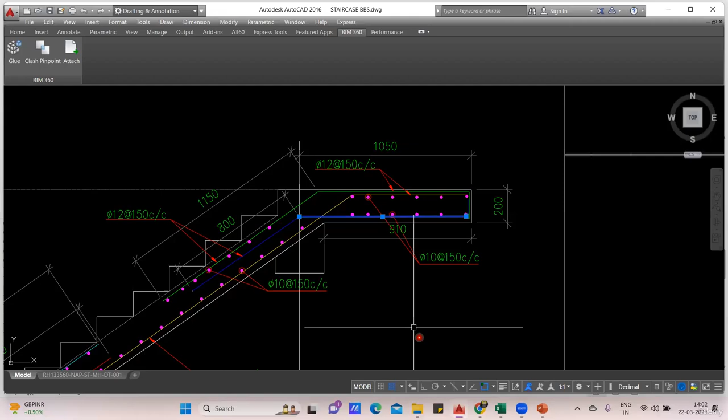So now here onwards, we'll try to find the BBS for this particular bar. So now I'm gonna find the BBS for the green color bar. That is this particular bar, which has gone like this, and then it has got a bend. So again, this is divided into three parts. First, we'll find this part, then this horizontal part, and the inclined part. Now, luckily, this inclined part length is already given, which is 1150. So don't have to worry about this length.

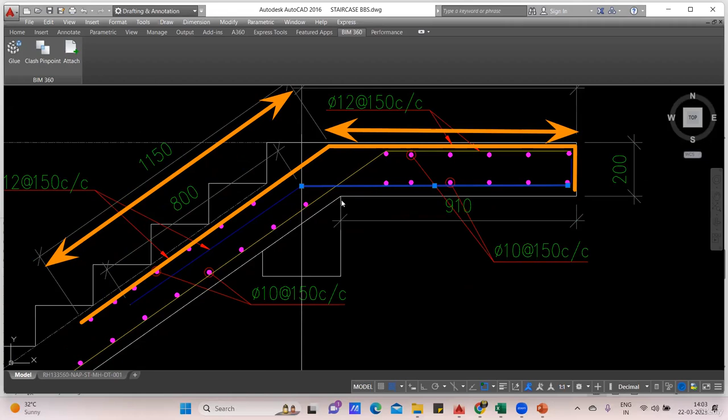Now coming to this part, how you'll find this particular part? That is also very simple. They have given you from here to here it is 910, but they have given one more value, this one. If I bring it down, let me remove everything. They have given you this particular length, which is 1050. So this 1050 is this one. So from this 1050 I'll deduct one cover from this side. Then I'll get this straight portion length.

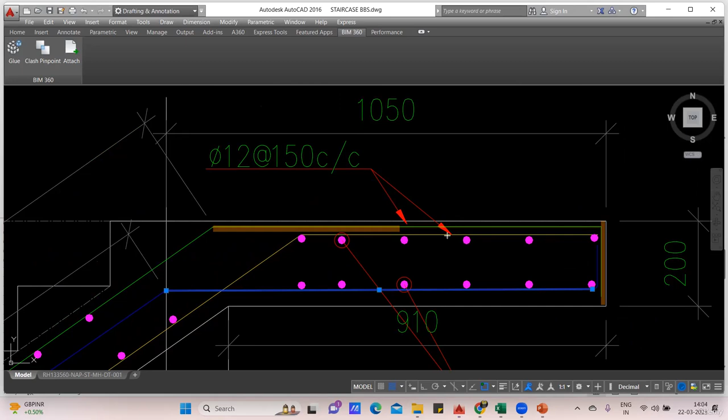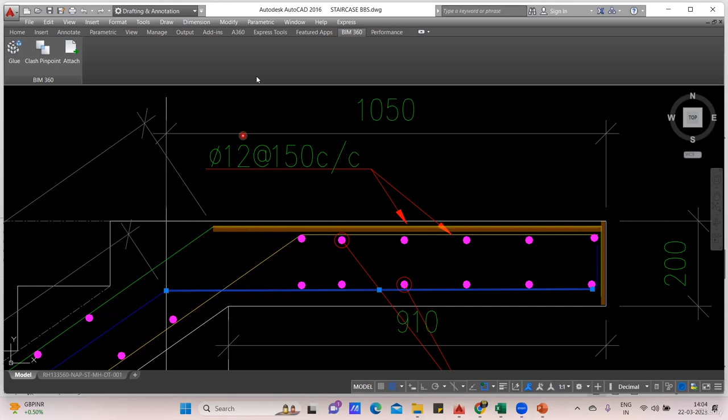What will happen? So this 1050, one cover I'll deduct from here. So then I'll get this particular straight line. Again, you can take out one small cover even from here also if you want. Otherwise, you can take out only one cover from one side because anyhow, this side the weather exposure will happen. Here there is no exposure, but still to be on the little safer side, we can deduct another 20 mm because here in the drawing, it may be exactly matching here.

Like this value 1150 is up to here, but practically on the site a small curve will come there. That is the reason we'll take another 20 mm extra. If you want, you can add it, else it's not an issue. So 1050 minus one cover from here, and from here you can deduct another 20 mm from this side. That is fine. And now coming to the last portion, that is this one.

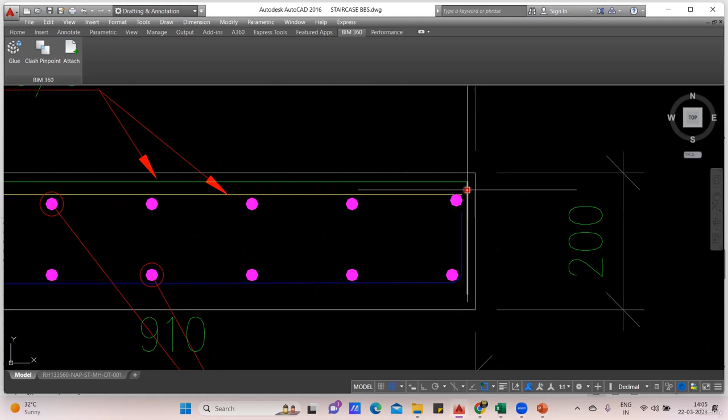So how we will find this? It's very simple. We know 200 is the thickness of your landing slab. From bottom you take out one cover. From the top you take out one cover. Whatever answer you get, you take 2/3 of that, like we did in the previous cases. So three things you understood. So directly remember this is 1150. So go to the Excel sheet. I've written this 1150 by default. Then this will be 1050 minus 20 from the left side, minus 20 from the right side. And this is 108.

How is that? Because 200 is the thickness of your landing slab. From top, I'll remove 20 cover. From bottom, 20 cover. And whatever answer I get, I'll take 67% of that. That is 160 into 0.67. You'll get 107.2. You take a round up of this. After doing that, you'll get 108. Round up 200 minus 20 minus 20 into 0.67 comma 0 I have done. You get 108. Finish.

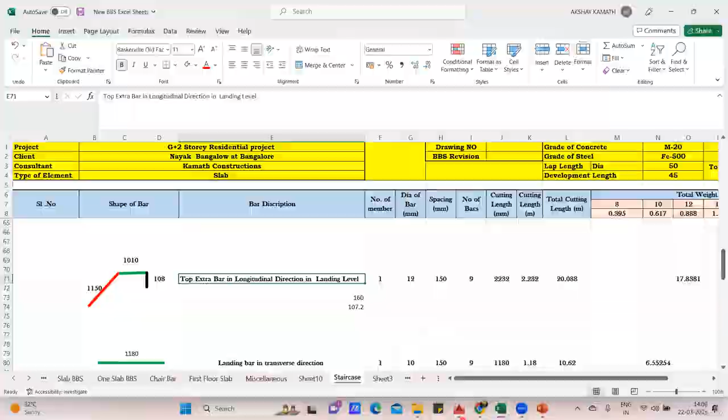So what is the name for this? It is top extra bar in longitudinal direction landing level. This is from extra portion, it is coming in the longitudinal direction, and this is at the landing level. So I've written top extra bar in longitudinal direction in the landing level. So again, what is the diameter? This green color bar is 12 diameter at 150. So I mentioned 12 diameter at 150.

Cutting length will be how much? 1150 plus 1010 plus 108. Then you have to do the bend deduction if you want. One is 90-degree bend here and one is 45 degree. So 2D plus 1D is 3D. So minus 3 into D I have done. So you'll get 2232. Convert this into meter, it is 2.232 meter.

Now come to the number of bars. Again, remember this is a longitudinal reinforcement. So whatever number of bars you got for yellow and red color, same here also the number of bars will remain same: 9 bars. Else, simple calculation: round up 1220, the width of your flight, minus 20 minus 20 for both side covers, divided by spacing of 150, plus 1, you get 9 bars.

So total cutting length will be 2.232 into 9 into 1. This will give me 20.088 meter. And since it's a 12 diameter bar, I'll put that in 12 diameter. 20.088 into 0.888 will give me 17.8381. Fine. So once this is done, below that, you have this distribution still going, right?

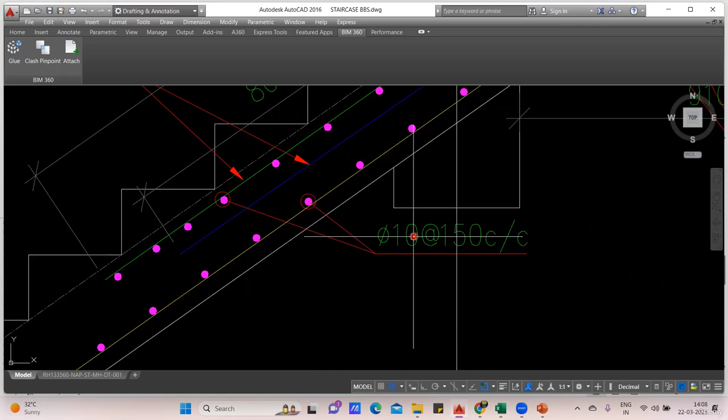So no problem. Again, coming to the diameter part. So it is mentioned here: it's a 10 diameter bar at 150 center to center spacing. So I mentioned 10 dia at 150. Cutting length will be 1180. In terms of meter, it is 1.18. Again, number of bars will be how much? How are you going to do that?

Wherever this inclined length you have got, 1150, in that portion only your landing bar will come, right? Wherever this inclined portion you have got, this one here, under that only your distribution reinforcement will come. This length we know is 1150. If I divide this by the spacing, which is 150, and then add 1, you'll get the number of bars. Okay, got it? Same thing I've done here.

Number of bars: 1150 divided by spacing, that is 150, plus 1, you'll get 9 bars. And therefore total cutting length is 1.18 into 9 into 1, which is 10.62. And since it's a 10 diameter bar, I'm putting the weight under 10: 10.62 into 0.617, which will be 6.55 kg. Got it? Now another 2 bars are left.

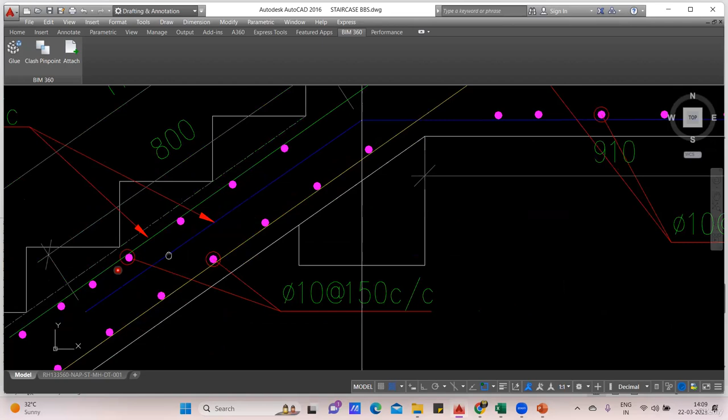The next bar I have is this blue color bar, this complete thing. Again, this is also divided into 3 portions: this portion, then the straight portion, and then this portion. Most of the time this length will be given directly to you. From here to here, it is mentioned as 800. This length I know how to find: overall depth minus top cover minus bottom cover, and take 2/3 of that.

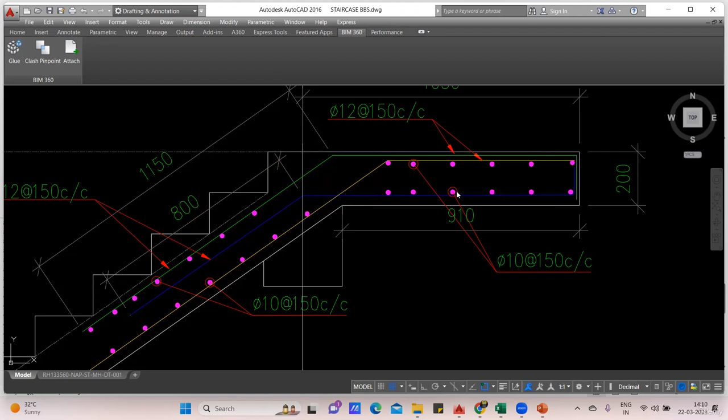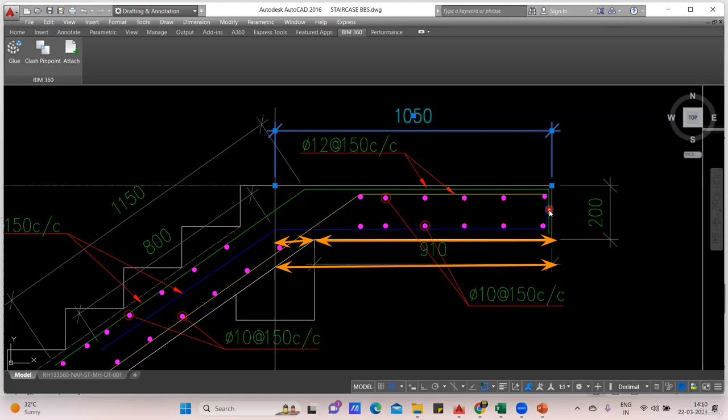So the question now is how we'll find this length. We know this is 1150. We know from this center to this part it is 1050. This 910 is only up to here, so up to the center of this it is 1050. From this 1050, I'll deduct one cover from this side, and your answer is ready. Only one cover, because here there is no cover, since this is going into the beam portion. You don't have to do any deduction for this.

So what you will do? Come to the Excel sheet. This is 800 given directly in the drawing. No worries. This is 108. How? Round up: 200 is the thickness of your landing slab minus top cover minus bottom cover into 0.67, which gives 108. Same thing here. So this will be how much?

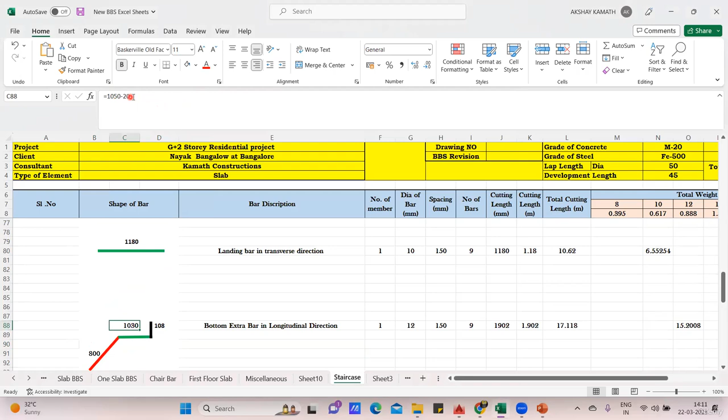1050 is the width of that landing portion minus one side cover. This is 1050. If I deduct only this side cover, 20, I'll get this length, from here to here. That is, 1050 minus one cover will give me this particular length. Okay, getting my point? Good. Simple. So once you do that, you'll get the answer.

Okay, I've written here bottom extra bar in longitudinal direction. Why is it bottom extra? Because this is at the bottom and it is going longitudinally. So it is called the bottom longitudinal bar in the landing slab. Or you can write at landing level also, it's okay. It's understood. So the number of members is 1.

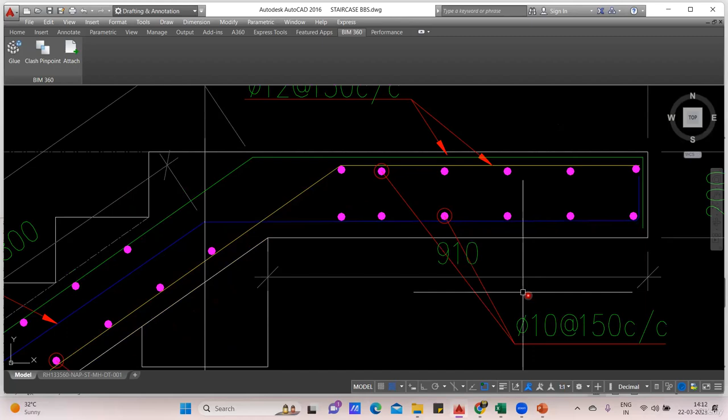Again, coming to the diameter, check what is mentioned. So it is mentioned you're supposed to provide, so this blue color, right? 12 diameter at 150 center to center spacing. So come here, 12 diameter at 150 center to center spacing. So total cutting length will be

800 plus 1030 plus 108 minus one 90-degree bend here, that is 2D, and one 45-degree bend here. 2D plus 1D is 3D. So minus 3 into 12 you do. So you'll get 1902 mm. So in meter it is 1.902.

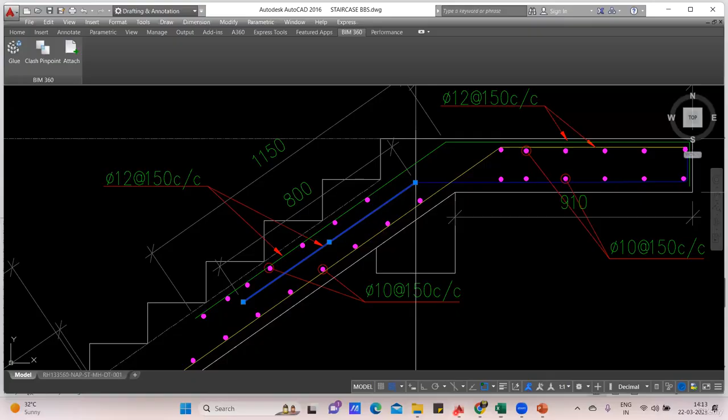Now coming to the number of bar, since it's a longitudinal bar, I've already told you, whatever number of bar you got for this yellow, green, this also will be same number of bar because your width of the stair is same. 1220 minus 20 minus 20 divided by spacing plus 1. So if you do that, you'll get 9 number of bar. Same thing I've done it here. Minus 20 divided by spacing plus 1. If you do this, you'll get 9 number of bar.

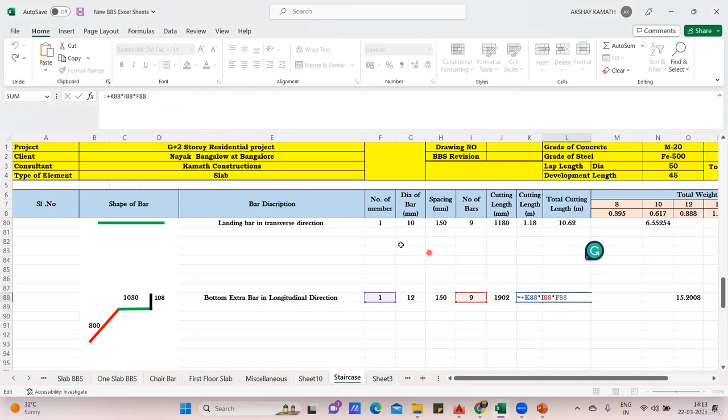So total cutting length will be 1.902 multiply by 9 and multiply by 1 will be 17.118. Therefore, total weight will be, since it's a 12 diameter bar, under the 12 diameter column, 17.118 multiplied by 0.888. This will give me 15.20 kg. Got it? Finish. Almost all the part is covered. Last one part is left out. That is the landing level.

In the landing level, if you can see, these are the distribution steel what we have provided, right? This steel, can you see? This one, this one, this one. So these are my distribution steel. So if you ask me practically show it, this is how it looks practically. This steel I'm supposed to find. This one, distribution steel. This I haven't found so far. Okay. So how you will find? It's very simple. Cutting length remains very simple.

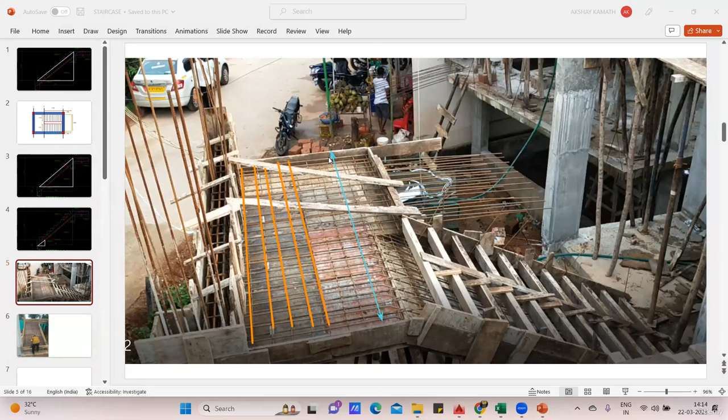You should know what is the length of this steel. What is the length of this? From both the side you deduct the cover. One cover from here, one cover from here. You'll get the cutting length of this. We'll try to do that. Go to the drawing. So here it is given 2600 is the length of your landing slab.

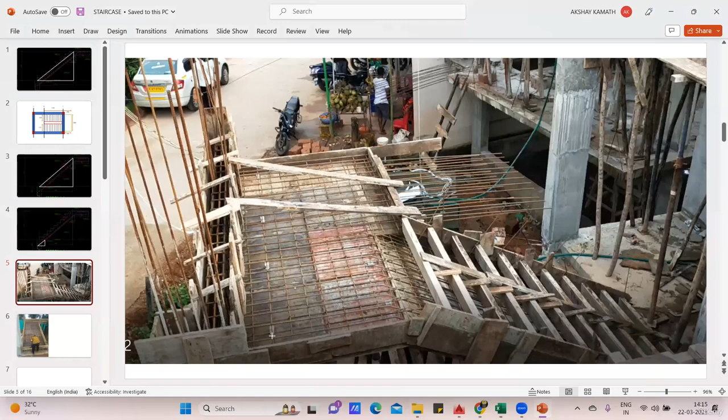So from here I'll deduct one cover. From here I'll deduct one cover. 20, 20. If I deduct, I'll get the answer. So I'll write here 2600 minus 20 minus 20. So 2560 is a cutting length. That means this bar, whatever you have put practically on the side, this cutting length will be 2560. In this way, 2560 we are going to cut the bar.

But how many bars we require? For that, I need to know this length. If I know this length and if I know the spacing between these two bars, I can find how many such number of bars is required. So for that, what is the length you're supposed to take? For that, we'll go here. Yeah.

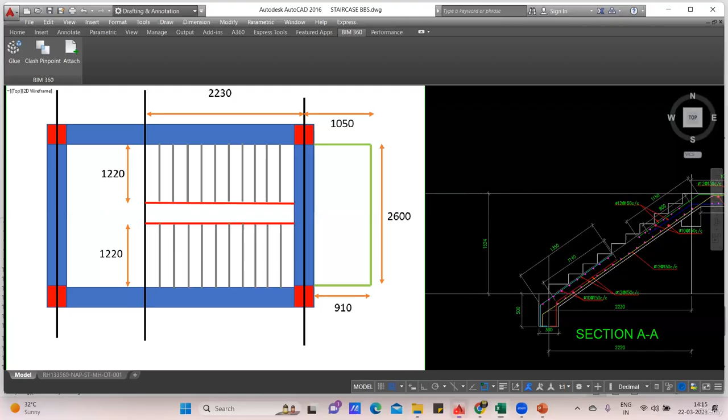So how many bars are required? For that, I want to find how many bars are required in this area, right? We know this length is already given. This length is how much? 910. So from this 910, if I remove one cover from this side, I'll get the length. And if I divide that by the spacing, I'll get the number of bar. Very simple.

So this length is 910 for us, from the face of the beam. So practically here a beam will come. From this length I want. So in 910, this side cover I'm going to deduct, because here you don't have to deduct any cover. It's continuous, no? So from here it is 910, and from here one cover I'll deduct. And whatever length you get, you divide by the spacing, you'll get the number of bar which you're going to put in this direction. Simple?

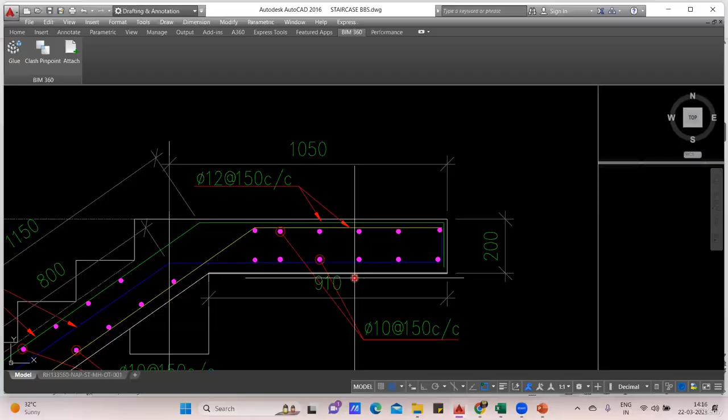Fine. So we'll do the same thing now. So 910 minus 20 you do. And what is the distribution steel given? It's a 10 diameter at 150. You can see it here, distribution steel, this one and this one. 10 dia at 150. So I've written 10 dia at 150. So cutting length will be 2560 only because it's a straight portion, no bend deduction. In terms of meter, it will be 2.56.

Now to find the number of bar, number of bar will be 910 is the length what we have, minus 20 cover. This I'll divide by the spacing. Spacing is 150, plus 1. So 6.93 bars I'm getting. I'll round it up. So ROUNDUP, bracket open, close, close, and done.

So I'm getting 7 number of bars. But why is it 14 here? The reason is that, you see here, these 7 bars will come in the bottom. In the same way, 7 bars will come at the top. So the calculation remains the same. I'll do it only for the bottom portion, and if I multiply by 2, I'll get the number of bars in the top as well.

So practically, if you look at the steel we have put, we have top steel also. In the top we have put 7 bars: 3, 4, 5, 6, 7. In the same way, in the bottom, it's not possible for you to see here, but your steel will come. In the bottom another 7 bars will come exactly below, because there are two meshes. That is why in the drawing you can see bottom 1, 2, 3.

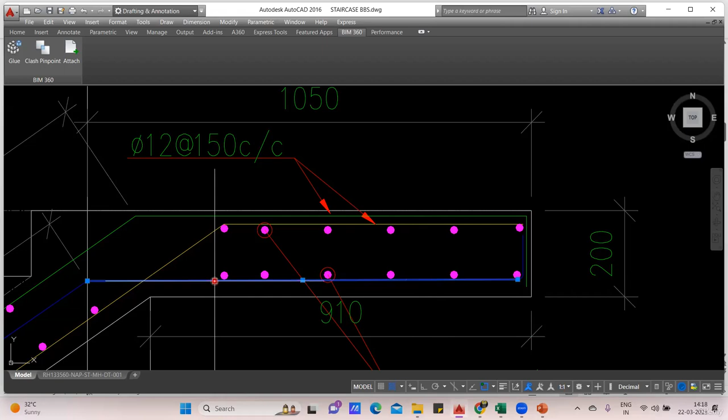Above this blue color bar, one distribution steel will come, and below this yellow color, distribution steel will come. That is why 1, 2, 3, 4, 5, 6, 7 bars will come. So I'll multiply this by 2. That is the reason I multiply 7 into 2. How much did I get? 14. So I got 14 here.

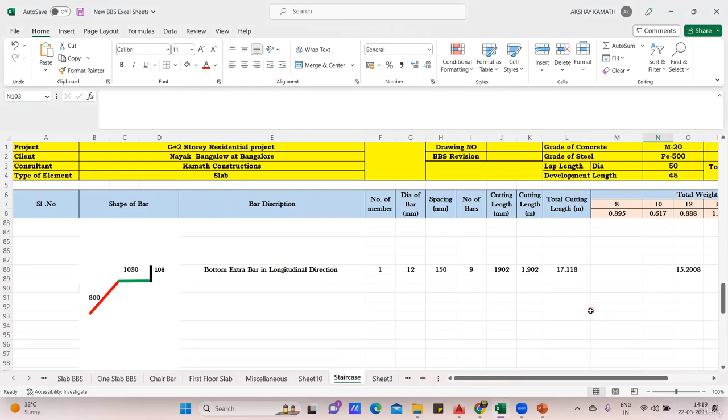Got it? Finish. Now the cutting length will be 2.56 into 14 into 1, which is 35.84, and for total weight, it's a 10 diameter bar, so 35.84 into 0.617 will be 22.113. Simple. So in this way, the entire BBS for the staircase is completed. I explained it for one flight; similarly, you can do it for the other flight also.

Now coming to the total weight of the steel. Under 8 mm, there is zero steel. Under 10 mm, you add everything: 49 kg of steel is required. Under 12 mm bar, 95 kg of steel is required. So total, 49 plus 95 comes out to be 144.843 kg of steel required.

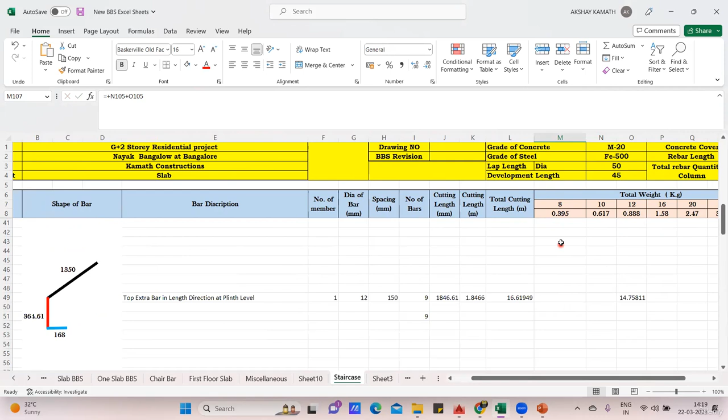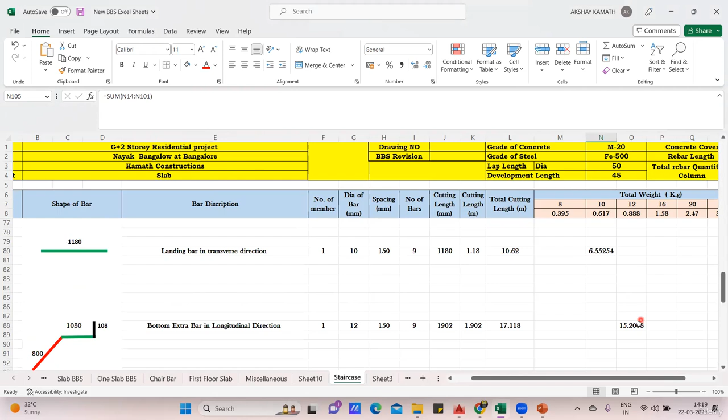So how did I do it? You just have to add all the bars under 8 mm; in 8 mm we don't have any. Under 10 mm you add everything, whatever steel kg you got, and it will come out to be 49. Under 12 you do the same thing: add 33 plus 13 plus 14 plus 17 plus 15, and you'll get 95 kg. If you add both, you'll get the total steel, which is 144 kg.

So as a thumb rule, always remember that in a staircase you usually get 150 to 200, or 250, kg of steel in one single flight. This is a thumb rule you need to remember. If the reinforcement is a little heavy, it may go close to 200. But here we have got almost 144 kg of steel. So always remember what happens in the staircase.

Roughly you get 150 to 250 kg, I'll write it here. 250 is on a very high side, but it's okay. That much steel is required per flight. You can take it as a thumb rule, and even if you don't know how to do the BBS for the staircase, assume around 200 kg of steel in a single flight. Check how many flights you have, multiply, and you will get the total steel required in the staircase.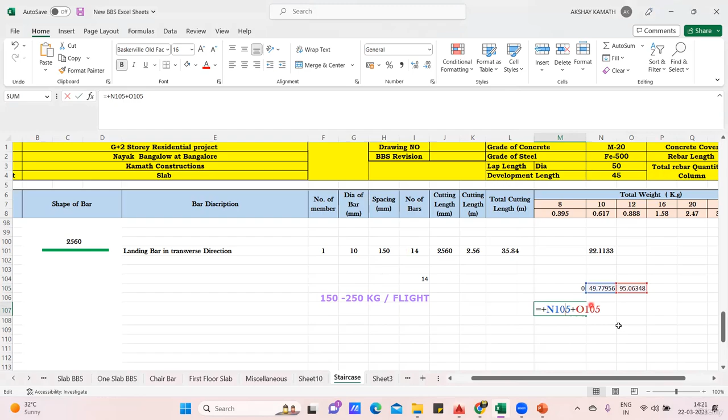In the staircase, the BBS is a little tougher, but the amount of steel is very less, almost 150 to 250 kg per single flight. So I got 144 kg here after adding all those things. That's how the complete BBS for the staircase is done. Try to practice it once or twice. In the future, if I find some other staircase, I'll be adding it here also. But try to practice this.

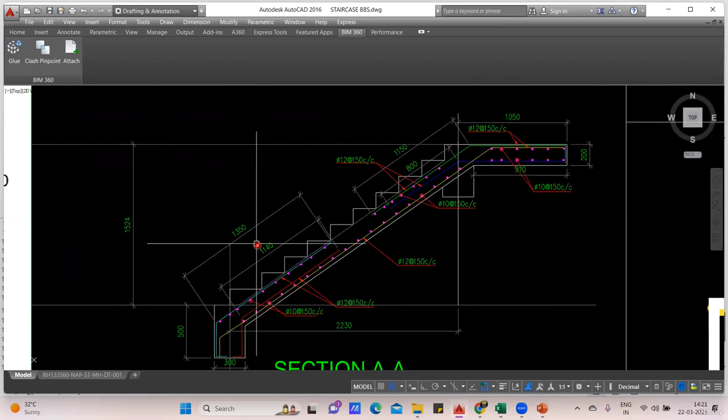Whatever values I have given, don't take these values while you practice. Take different values and try on your own so you'll understand it. First practice like I've explained. Later, instead of 1524 take 1600, take 2800 here, change this 1350 to 1500, change this 1140 to 1200. Change all the diameters so that you can practice.

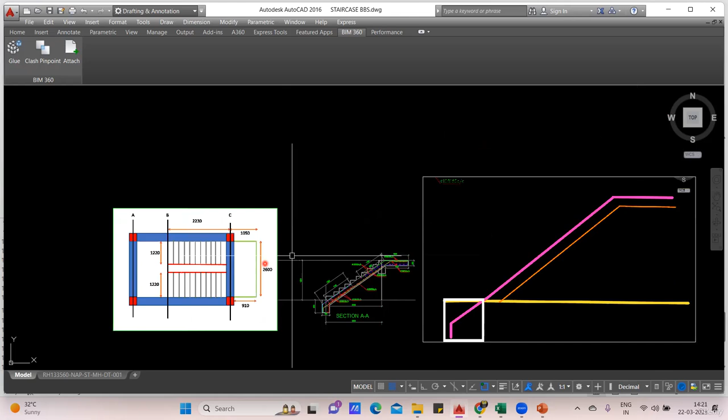Keep the same model. If you want, you can even change all these things. For this landing, instead of 910 keep 1000. Change this landing width to 3000. Change the stair width to 1500 and 1500, so that you can practice, prepare your own Excel sheets, and master the staircase part.